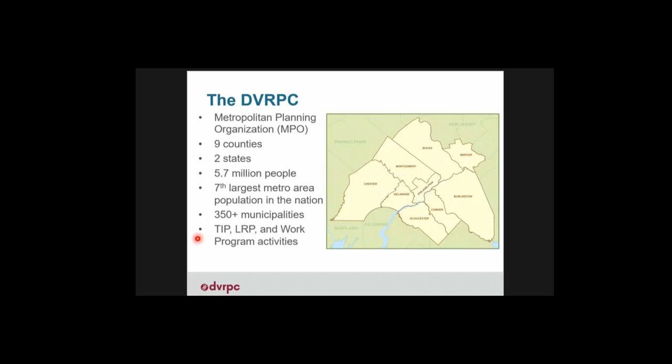So looking at the study here, we see 202 in black, proceeding around the periphery of Philadelphia. It connects the 4 suburban Pennsylvania counties in the region. Section 100 specifically, which is further south, serves as a vital link to Delaware, but also as a local arterial within Chester County. And Chester County itself is the fastest growing county in southeastern Pennsylvania, projected to increase population and employment 28.4% between 2015 and 2045. So a lot of the growth is going to fall on US 202. In fact, if I'm heading home from Wilmington to Northwest Philadelphia, I'll be routed on US 202 as opposed to I-95. So it shows that this road sees a lot of through traffic. It's not just a local highway.

So born out of this growth and this projected demand, PennDOT, along with CCPC, the Chester County Planning Commission, and also the townships approached us and wanted us to take a look at some points along the roadway that are bottlenecks or problematic areas, and make recommendations to improve operational efficiency along the corridor. And we'll find that operational efficiency depends on who you ask. Obviously, PennDOT has a different priority than maybe the county or the townships in terms of where we're giving time, and our priority in terms of the traffic flow from road to road.

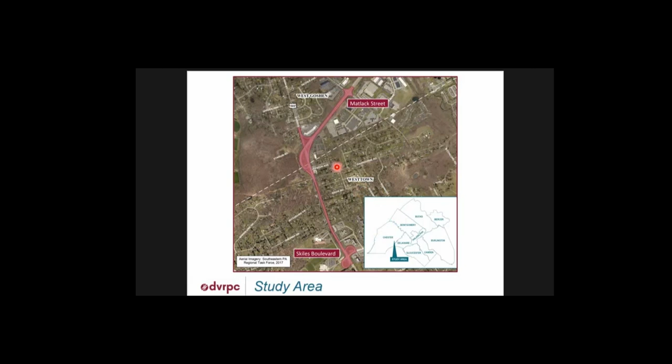So our study area is from Skiles Boulevard down here in the south, up north through the Matlack Street intersection. Skiles and Matlack are signalized intersections, and there's also a signalized intersection right here at the Parkway Shopping Center as you get off US 202. And here is our VISSIM model that we built for this project, so it's not a huge study area. Besides modeling, a lot of our countermeasure analysis has to do with safety and crash reports.

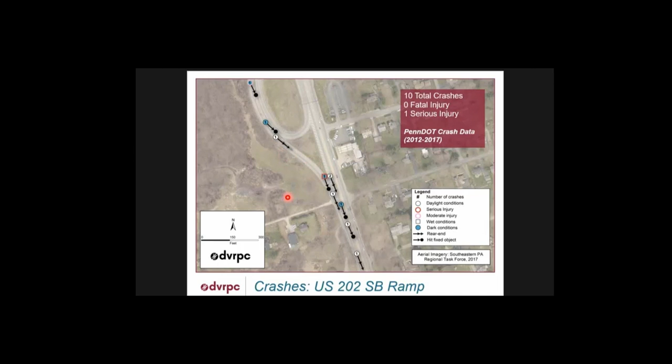So looking at the crashes for each intersection, the furthest north intersection, US 202 and Matlack Street, saw 55 total crashes from 2012 through 2017 with 1 fatal injury. On the US 202 southbound ramp, 10 total crashes with 1 serious injury. One thing to note is that there are a lot of hit fixed object crashes here and also a decent amount of crashes at night. So that could speak to either poor guidance in terms of lane departure or lighting, but also the serious injury was down here at the merge, so there could be some issues we can look at in the merge safety-wise.

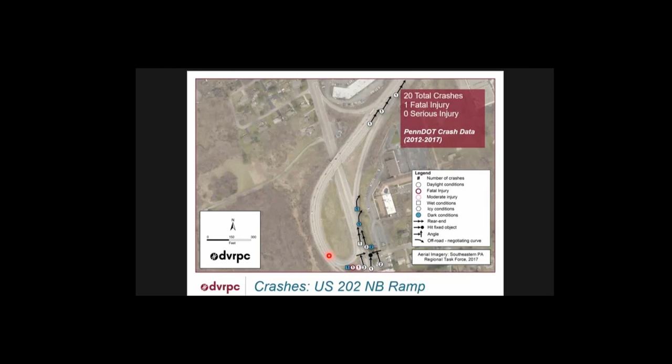And then on the 202 northbound ramp, 20 total crashes in that area with 1 fatal injury. This could be a bit skewed in that it wasn't really on the northbound ramp, it was at this intersection a bit further upstream of it, but this was definitely a consideration in our alternatives. And finally, the further south signalized intersection at Skiles Boulevard, 27 total crashes, none of them fatal or serious.

As for the corridor, the majority of these crashes were rear end crashes, 52%, followed by angle crashes. We saw 188 total crashes, 26% of which occurred in 2017, which represents a gradual increase over the 6-year period. We saw 2 fatalities over the study period in this corridor. And then 9 crashes on the southbound ramp or near this merge with southbound US 202, which we keyed in on as an area that could be improved with operational recommendations.

But the crashes didn't tell the full story, and we went into volumes as the second step in modeling to provide alternatives. So the AM peak hour from 7 to 8 a.m. and the PM from 4:30 to 5:30. One thing to note is that northbound volumes are higher than southbound in the AM, and that's presumably due to commuters heading up either to Philadelphia or to the business parks along US 202 in the counties surrounding Philadelphia. And in turn, the southbound volumes are the commuters coming back home.

One thing we also saw in our fieldwork and in the model was a significant eastbound left turn queue at Matlack Street during peak hours, especially during AM peak hours. So we'll take a further look at that.

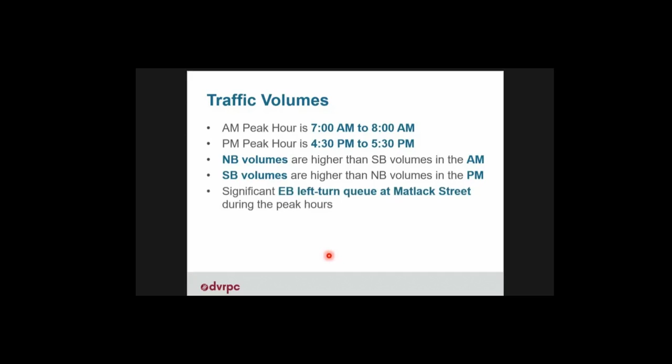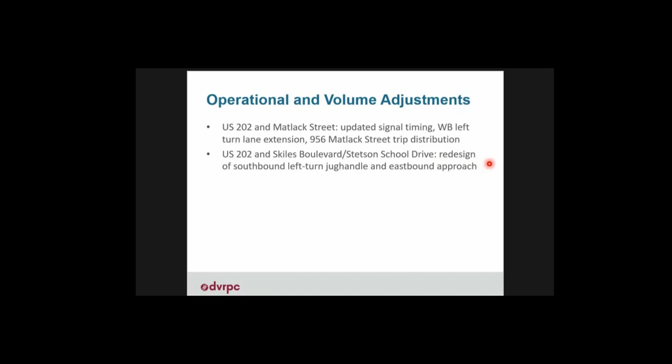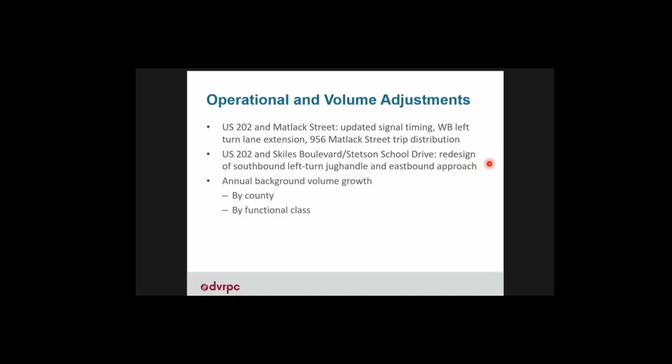And then, of course, this annual background growth, which is informed by the DVRPC regional model, which is separated by county and by functional class. So we've kind of applied that as a blanket in addition to these specific trips generated by local developments.

Another thing that we added, I kind of call it the Jersey factor, is if anyone's driven in Philadelphia, we're not the most defensive drivers. So as these volumes increase, we would expect people to get more aggressive, especially at merges and near ramps. So we adjusted the driving behavior in VISSIM to try and simulate increased aggression.

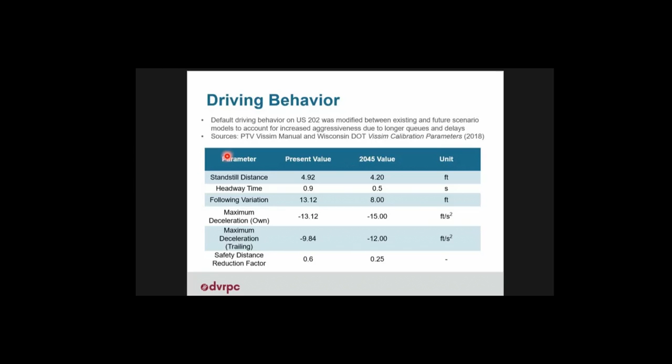And then we also used, in addition to the PTV VISSIM manual, Wisconsin DOT's VISSIM calibration parameters to inform this. You can tell we adjusted standstill distance, headway time, following variation, maximum deceleration for the vehicle itself and the trailing vehicle, and also the safety distance reduction factor, which did have a pretty noticeable impact on our model, but we felt that was pretty accurate, as Philly drivers are aggressive enough, and you stick them in 2045 traffic, they're going to get even worse, especially near ramps and merges.

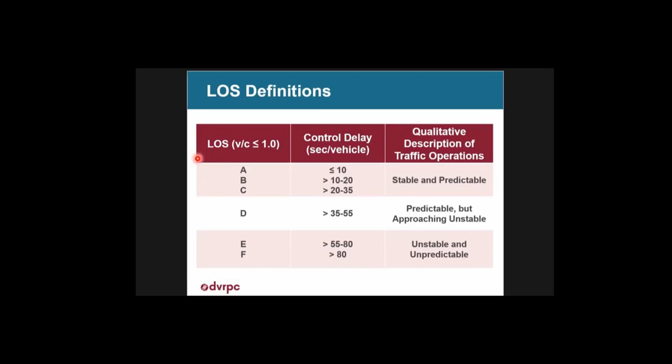And then looking at travel times through this corridor, it's not a terribly long corridor, but we see travel times between existing and no build in the AM double for all of these basically. So if you're heading north or south through the intersection, and then I guess triple in this case for east, if you're taking a left eastbound and heading out of the corridor in the north.

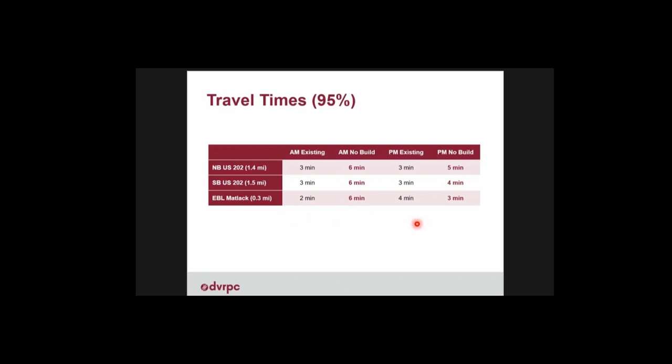PM was a bit less pronounced, so from 3 to 5, 3 to 4, northbound and southbound respectively, actually decreasing eastbound left, and this was just due to PennDOT's signal timing adjustments that were made at the intersection, which actually helped clear out that queue.

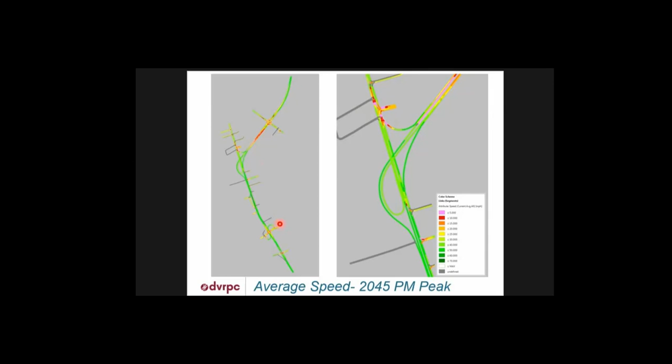Also, one thing to note is that the climate around this was, we need to widen this, this is the only way we're going to be able to accommodate all this volume. And you can see from the average speed in the model, there's still a lot of green here. It's not like you need to widen all of 202 to accommodate this. It's really just a matter of addressing these bottlenecks and freeing up flow there. There's clearly enough capacity in other sections. It's not like we need to waste money and widen the entire thing. So that informed our alternatives.

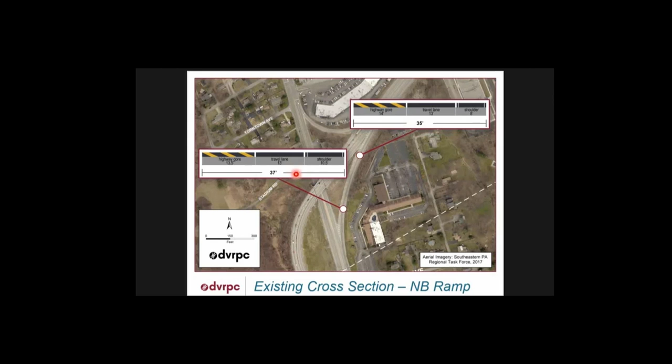Looking at the cross sections at the ramp, we obviously have shoulder and gore through here, but there's a decent amount to work with. So our alternative was to squeeze in another lane on the inside. And obviously this merge that I showed you earlier is problematic because we do still have a lane coming from this road here. They loop around and come up. So we have to address that, and we chose to address that by making this approach stop controlled.

There are a couple reasons for that, but mainly it's just a volume issue. About 5 times as many vehicles are coming north on 202 as the vehicles coming south here and looping around. So with stop control here, these vehicles have to wait a little bit longer, but for the overall health of US 202, we felt it was necessary.

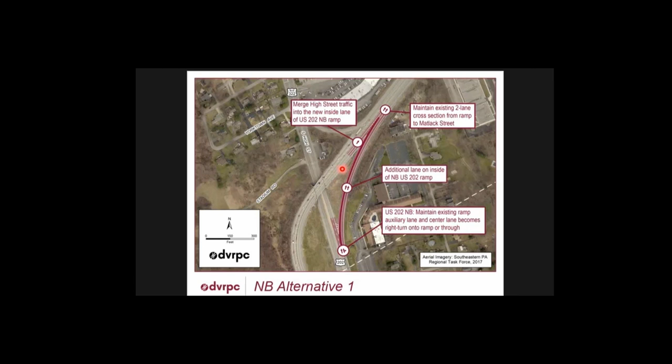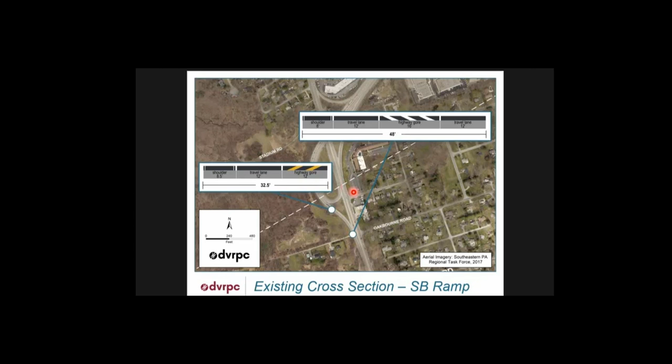And then looking at the southbound ramp, again, we have gore, we have 12-foot travel lanes and the shoulders, but there's definitely room to work here. So our recommendation was to add an additional lane on the inside, and in terms of minimums, the curve radius is acceptable within PennDOT's limits. And then the issue becomes just merging down here, and our different alternatives address that.

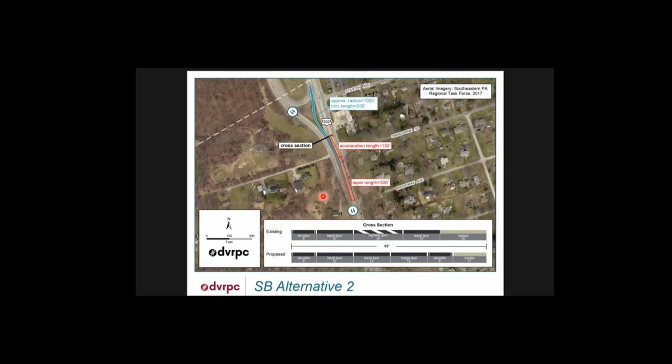So looking at the cross sections, our second alternative, besides just adding a lane, would be addressing this merging traffic. So to bend this ramp in and bring it along this southbound traffic and have them taper off and merge in with 202, to give 202 the feeling that it's more of a major roadway, and the High Street southbound traffic is secondary to that. So they would have 150 feet of acceleration and then 300 feet of taper. So this traffic up here would have to get over by about the Broadway Avenue intersection.

And then alternative 3, which PennDOT brought up and we threw in the model just to see, would be to actually put in a traffic signal here and signalize this approach as opposed to having it be free-flowing. This would also mean that all traffic coming from southbound High Street would come up here and either take a right or would have its own phase and be able to take a left and continue south on US 202.

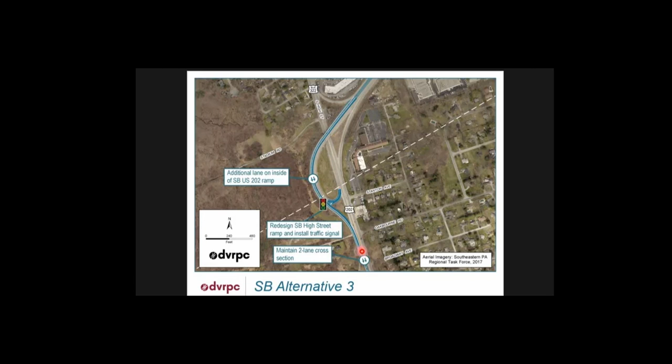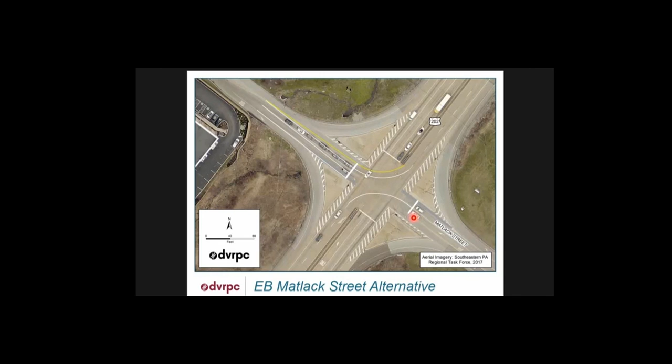And then to address the queuing on eastbound Matlack Street, adding an additional left turn lane just at the intersection, which works because with the developer putting in protected left turn phasing, we could have both of these lanes go in their protected phase.

So then we've gone over the alternatives, and the scenarios here are kind of combinations of the different alternatives. So scenario 1 would be the southbound first alternative, and then we only have one alternative for the northbound and the eastbound left. So obviously the advantage of this is the design is most similar to the existing conditions. There's really nothing downstream we have to do besides address this merge.

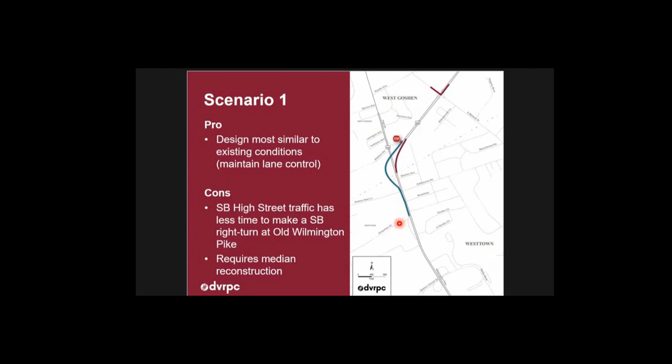Obviously the cons is we retain a lot of the issues that came with the existing conditions. So a lot of this southbound High Street traffic is an issue with getting off on Old Wilmington Pike, which is over here. So they basically have to cut across now 2 lanes of southbound traffic to get there, and it does require median reconstruction.

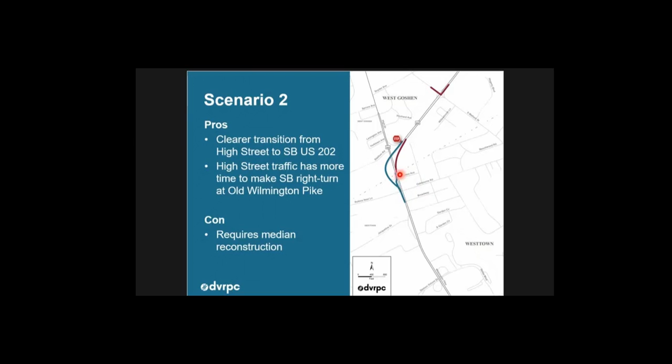Scenario 2 is a little bit better, kind of bowing that ramp in, kind of that lane in from southbound High Street. It's kind of a clearer transition from the borough and High Street to southbound US 202. And that traffic has more time because it's merging more smoothly with the 202 traffic. It does require median reconstruction as well. It's a little bit more intense in that you have to kind of adjust this roadway to come flush with the 202 ramp.

And then scenario 3 obviously is a safer way because you're getting them a dedicated phase. It does have higher southbound travel time because you're stopping this 202 traffic to let High Street traffic move, and is a bit more intense in terms of construction.

All of these have benefits though over the existing. They improve LOS at nearby intersections. They decrease travel times in 2045. They would eliminate bottlenecks at both of the ramps. Additional traffic control and clearer transitions from High Street could improve safety on the highway and in the surrounding area. And the double left turn at Matlack would reduce overall intersection delay and of course on that approach.

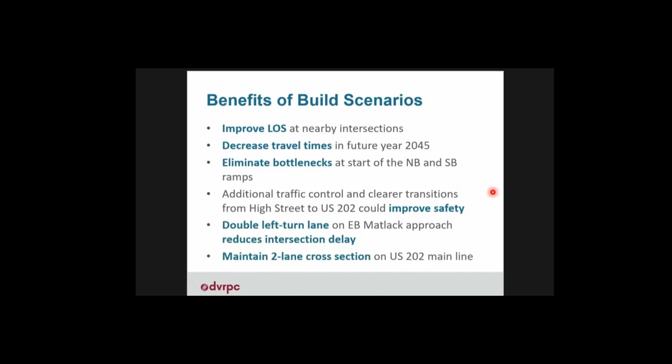And kind of something that should be standard, but US 202 already is a major highway and it's set to receive a lot more traffic. So just maintaining a 2-lane cross section is kind of vital just to maintain the viability of that roadway for years to come.

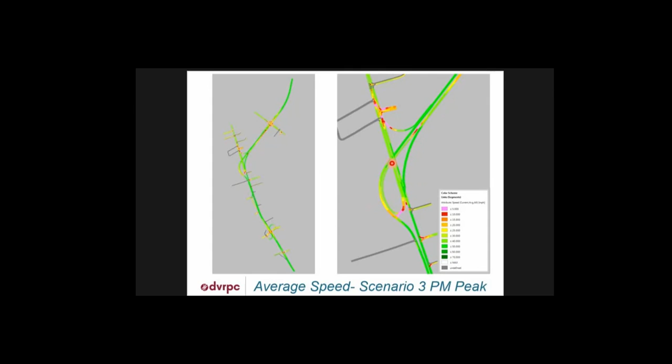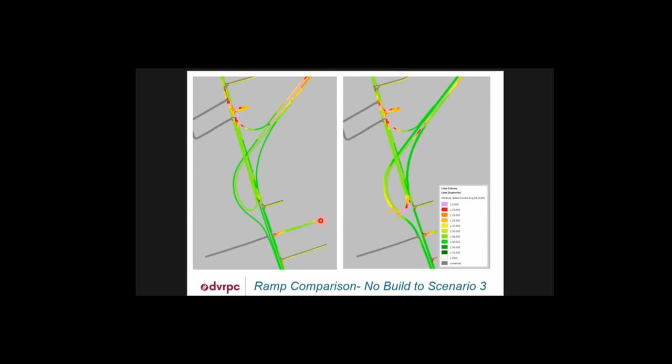So we see here, this is the full network, and obviously it's pretty similar. And looking at the ramps, we do have a little bit slower average speed just because of the signal control, and we do have stopped vehicles there from time to time. Northbound is pretty much the same. And then looking at the ramp comparison, again, you can tell it definitely addresses the northbound and also the southbound while maintaining safety and prioritizing the High Street southbound traffic from time to time.

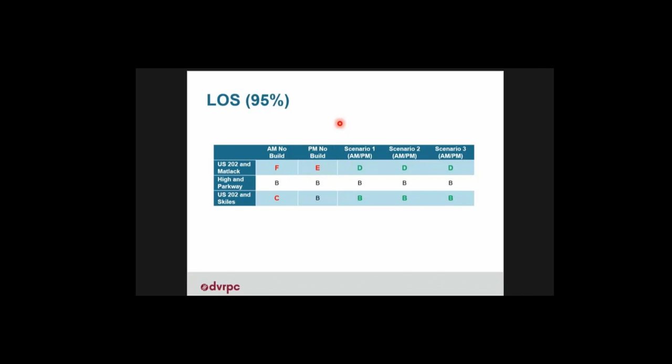Taking a look at the LOS as well. So we have in the AM no build, we had an F, PM, and an E. So in both AM and PM from scenarios 1, 2, and 3, 202 and Matlack goes up to a D, and 202 and Skiles goes up to a B, just by result of kind of controlling that traffic as it heads southbound.